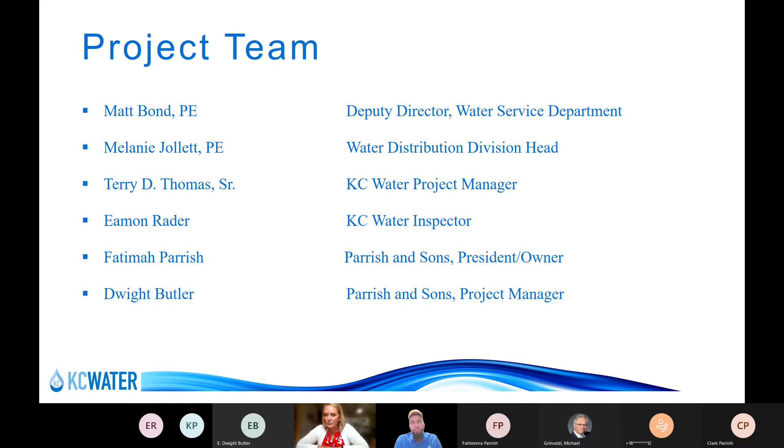Next slide. So we'd like to give a quick background on KC Water as a utility. For those of you who don't know, we are a 3-utility service provider. So we do provide drinking water, we collect and treat wastewater, and then we also have stormwater as part of our utility that we serve or provide.

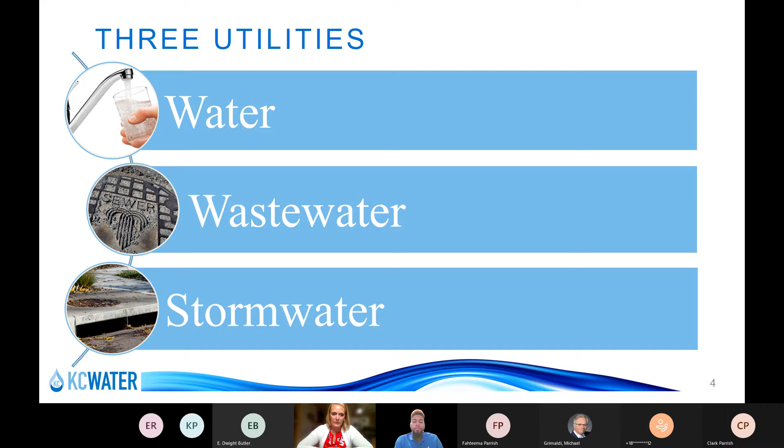Next slide. So really, to do these 3 utilities, we have a lot of assets that we have to manage, operate, and maintain. On the water side, we have 1 treatment plant, 18 pump stations, 2,800 miles of water main, which we're going to talk about more as part of this project. We have 35,000 valves and 23,000 fire hydrants. This infrastructure is what's needed to take clean water from the treatment plant and distribute it to the taps throughout the city.

Additionally, we have 6 wastewater treatment plants, 39 pump stations, 2,800 miles of sewer main, and 67,000 manholes on our wastewater collection system. Basically, this is what's needed for our collection system to collect wastewater from our customers and to treat the water safely so that it can be discharged back into the river.

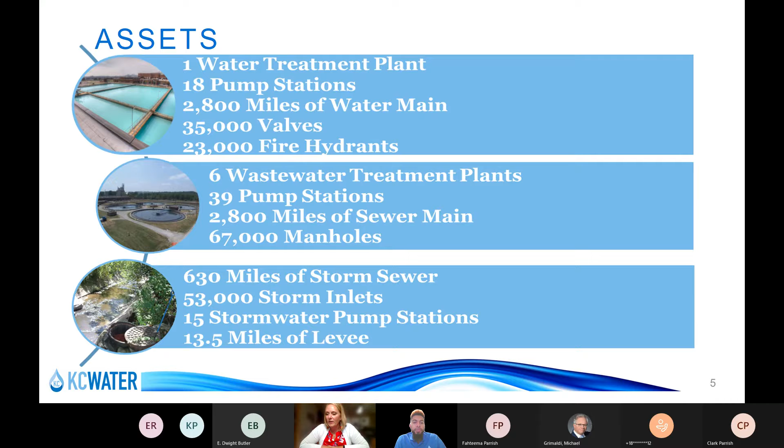We also have 630 miles of storm sewer as part of our utility, which includes 53,000 storm inlets, 15 stormwater pump stations, and 13.5 miles of levee. This helps protect the city from flooding during those heavy storm events that we see sometimes.

Next slide, Terry. All right, so really, I want to give you a little bit of background on the water main replacement program, since this is why we're here tonight, is for a project within this program. So as I mentioned, our distribution system includes 2,800 miles of distribution main. Some of these mains date back to the 1800s, so we do have some old infrastructure within our system.

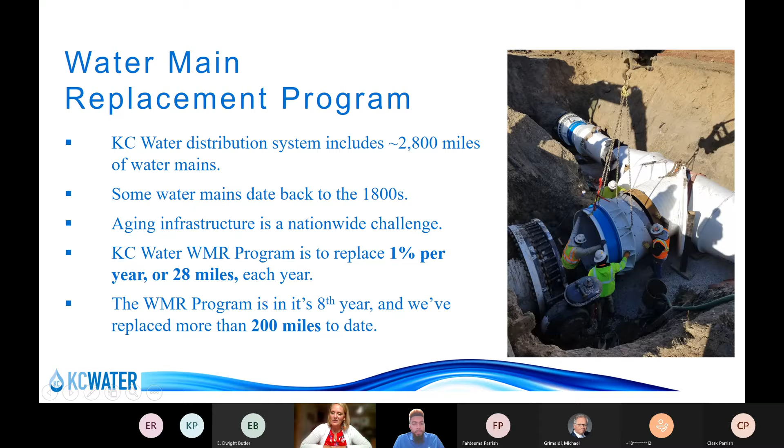Aging infrastructure is a nationwide challenge. It's not something unique to Kansas City, but what is unique to Kansas City is about 8 years ago, we developed a water main replacement program. This is really to address a lot of the mains and disruptions in services that we're seeing when we have main breaks. The goal of this program is to replace 1% of our distribution infrastructure a year, or 28 miles every year. As I mentioned, we're in our 8th year, and we've replaced more than 200 miles to date. So we're seeing a lot of really good progress within the program.

So how do we really pick or determine which mains to replace and when to replace them? We do this through data-driven priorities. We have a pretty robust asset management group, and we keep an asset database of all of our facilities and all of our infrastructure. So what we're able to do is look at our distribution system assets, and develop and identify likelihood and consequence of failure of each main within our system. We do that based on the age of the pipe, the number of breaks that pipe has historically seen, the customers and demand that pipe serves, and a variety of other criteria.

Looking at the likelihood and consequence of failure, we're able to establish a risk ranking for each main. This is done every year, and new pipes that have been replaced are taken out of the data set. So we're able to identify the top 28 miles of the highest risk main and develop projects with those pipes. We start by creating design projects, taking everything from design through bidding and then through construction.

All of the new projects are designed to have new zinc coated ductile iron pipes. These pipes are also wrapped in a polyethylene sleeve, and this gives the new infrastructure about a 100-year design life. So we should not see breaks on these new pipes that we're putting in the ground. This long-term infrastructure plan really does reduce service interruptions due to breaks, reduces our operation and maintenance costs, and we're also able to increase capacity and fire protection to our customers.

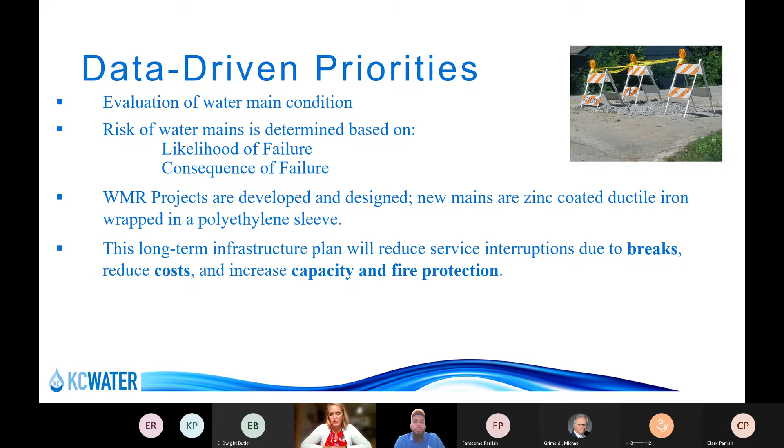What happens is when we take some of this old cast iron pipe out of the system, or old ductile iron pipe, we do see some tuberculation, which means buildup on the inside of the pipe. That reduces the inside diameter of the pipe, which reduces capacity and available fire flow. So when we put in these new pipes, we're getting larger available diameter, and that increases the capacity and fire protection to our customers.

And with that, I'm going to turn it over to Terry, and he's going to go into the specifics of this project tonight.

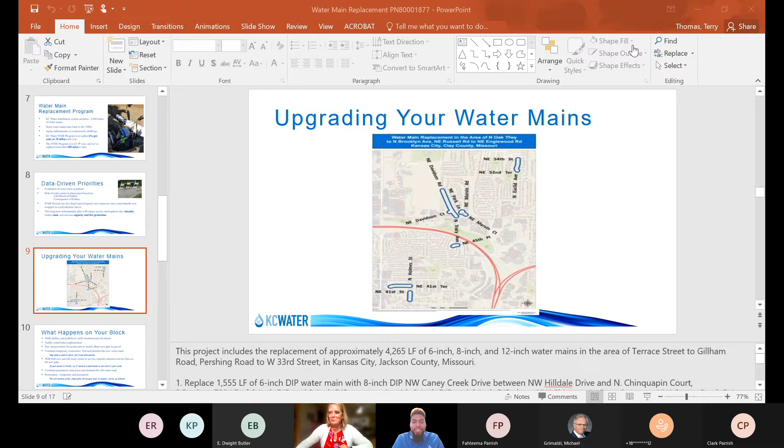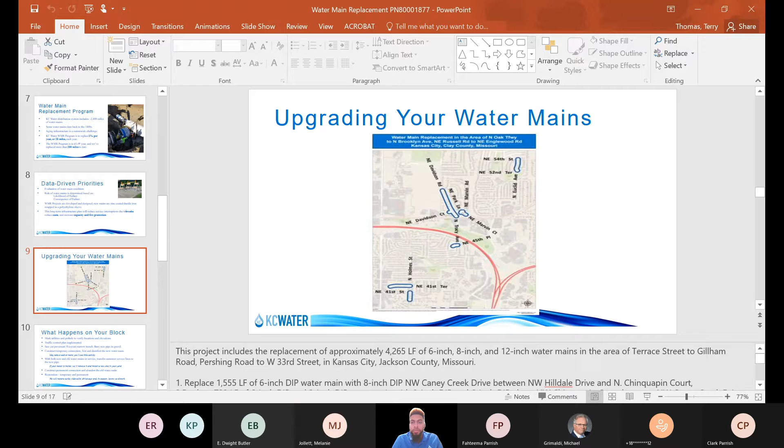Terry, you're muted. There you go. I'm still muted. There we go. There you go. Okay, I'm like, wait a minute, am I new to this or what? Okay, so we're back. Okay, what happened? This is bad.

All right, we're back. This particular project, forgive me guys, we're going to be replacing a little under a mile, specifically 0.85 miles of water main. As you can see, we've taken kind of a bits and pieces approach here. You see some things up on North Euclid Avenue, all the way down to North Home Street. But like Melanie mentioned, we have to identify those mains that are going to truly affect the system if they break, and that's the approach we take with these. You'll notice the longest stretch being done is on Northeast Davidson Road, but overall this is a much smaller water main replacement than sometimes we get in our program.

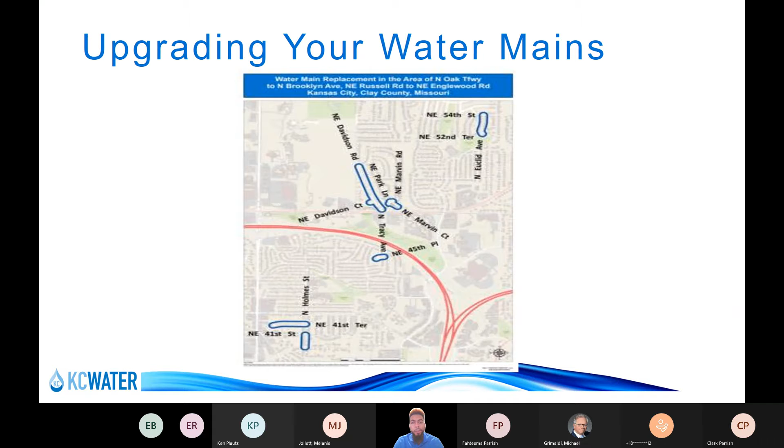So the real question: what happens on your block? Now that we're here, we decided that your main needs to be replaced in your neighborhood. Well, what happens when we get there? First thing we do is that the contractor will come out and mark the utilities. It's the first sign that they're on the way.

So if you see little flags sticking out, some fresh paint on the pavement or in your grass, sometimes on the sidewalk, depends on where everything is. They're just trying to make sure that each utility, whether it's gas, sewer, or an AT&T line, can be properly identified and matches what we surveyed when this project was in design. That way we know where to put the water main properly. Then they bring out their traffic control, whether it's cones, to make sure you guys can navigate the construction area properly. And then start getting into the action.

They start saw cutting the pavement because they're getting ready to lay the new water main in its new location. We do not take out the old water main when we do this. So 9 times out of 10, we are installing the new water main in a completely different trench than the old one.

Once they've done all this, the new water main is in the ground, but it's not active yet. There's no water flowing through it, and until it's tested and disinfected, we cannot put it into service. So there's always a delay. You'll see them laying pipe on your street, then no activity for a week, maybe up to 2 weeks, depending on how long it takes to pass the test.

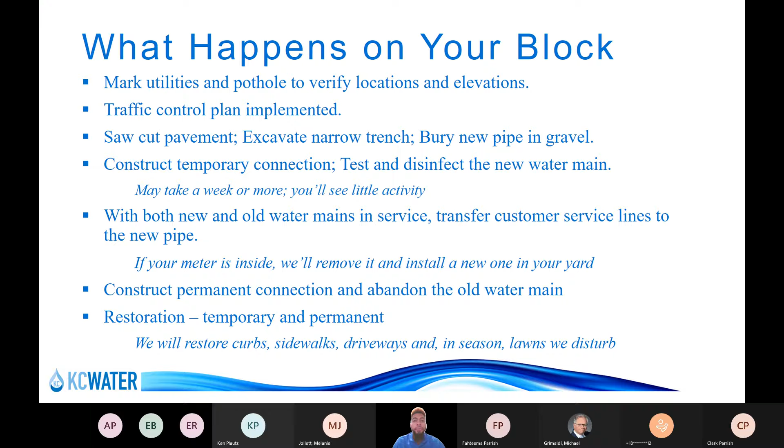The large backhoes, track hoes, and other large equipment will be in use on your block. Overnight, they're usually blocked, coned off, and parked on the end of the street to avoid anyone getting in the way or parking in front of your home. I know residents don't always like that, so we try to keep everybody happy. But what about people at the end of the block? It will be parked in front of someone's home at some point, but we usually try to keep it out of the middle of the street.

It will be noisy, dusty conditions. They do start early in the morning, 7 a.m., so if your commute isn't until after that, you will hear them outside.

Your service will be disrupted during this, at least a minimum of 3 times. For these 3 times: when we connect the new water main to the old water main on each end, that's 2 times, and when we're transferring your service to the new water main, that's the 3rd time your water is off. Usually these shutoffs last about 4 hours. We try to get in and out as soon as possible to limit disruption to your service, and you'll always be notified beforehand for these 3.

Now there's what we like to call a 4th, and as old as these water mains are, it may be a 5th, unplanned disruption. In those cases we can't notify beforehand, because it's likely due to a water main break, which they'll work diligently and quickly to fix and get back into service. Sometimes these things happen during construction, and the old water mains break while we're out there.

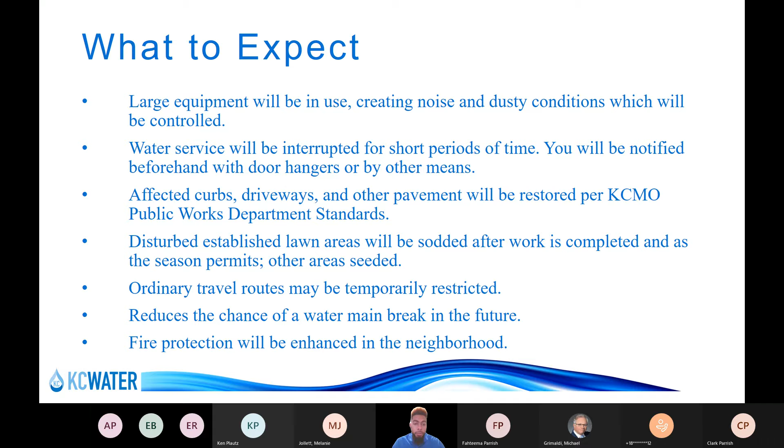As far as responsibilities go, once the meter is in and hooked up, everything from the first valve, which we call the curb stop, is KC Water's responsibility. Anything that happens to that curb stop or the service on that side, it's our responsibility to make sure it gets fixed. Now from the curb stop into the home, that is all customer responsibility. You may have seen in the mail over the past couple of years that we send out a third-party service to get your service line insured. That's because KC Water isn't responsible for the service line on the homeowner side of the curb stop.

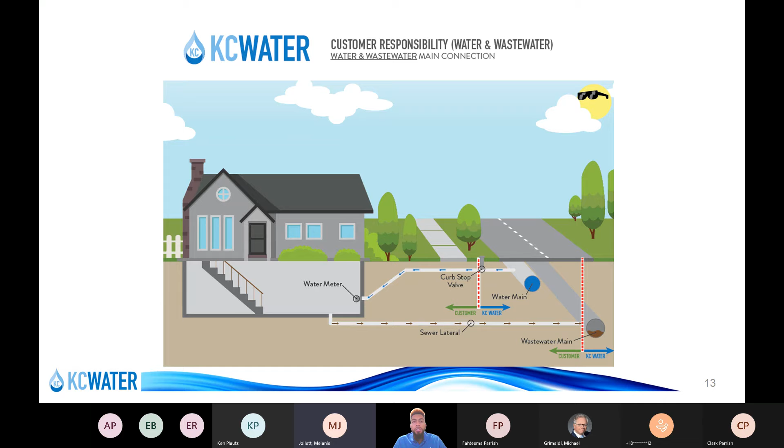I'll kind of touch on this, and then I'll allow either Dwight or Fahteema to let you guys know how they plan on sequencing. But we're on schedule to start in October. If all goes well, it'll be within the next two weeks.

The project is scheduled to last until June of 2022. Now, that does not mean that we'll be on your particular block the entire time. We kind of sequence our way through line by line on that photo that I showed earlier for all the areas being affected. They'll go one by one, lay the pipe, get it in service, restore it to what we can at the time.

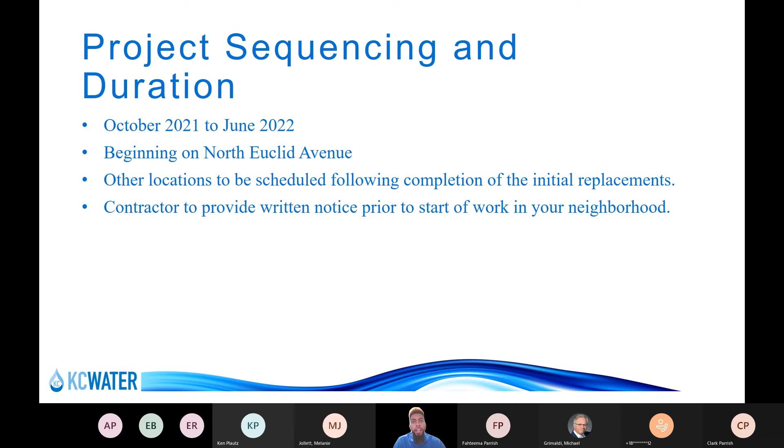If we can't do the sod, we'll always come back with at least the road restored, move on to the next line, and so on. Parrish and Sons has indicated that they will be beginning on North Euclid Avenue and then working their way around the project lines from there. So all the other locations will get scheduled after that. Again, you will be notified prior to the start of work on your block, so it will not be a surprise. You won't wake up one morning and hear large equipment outside bothering your morning—now you've got to get a double shot of espresso in your coffee.

All right, Dwight, if you want to step in, or Fahteema, it's up to you if you wanted to speak more on the schedule.

Well Terry, I just wanted to say that first off, it's a pleasure doing work for the city again. We'll be as courteous as we possibly can. We'll make sure that the customer, meaning the homeowners, will be notified in a timely manner. We'll be as quiet as we possibly can, and we'll get done as fast as we possibly can to ensure a successful project. And like you stated earlier, we are going to start on North Euclid as soon as we get the notice to proceed.

Thank you, sir. So again, you can find the postcard that you received via mail online. I have the link here: kcwater.us/projects/current-projects. It has not only this project, but of course a host of our other water main replacements as well. So if you happen to think you're going to be visiting a part of the city and wonder if something's going on here that's going to mess up your fun, like at the plaza, you can get all that information right here in one place.